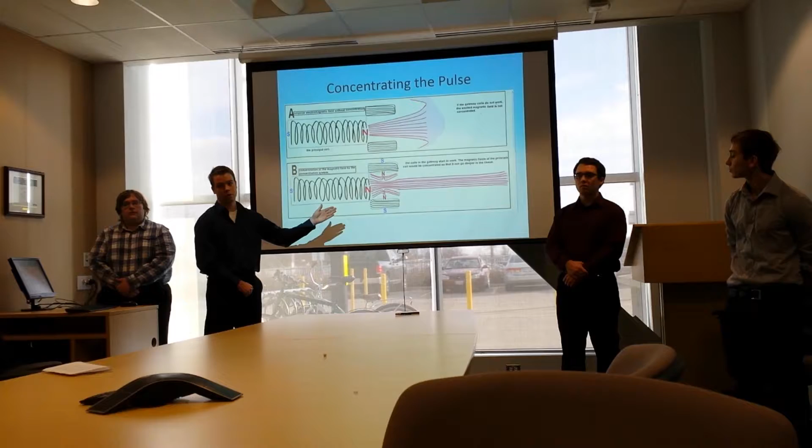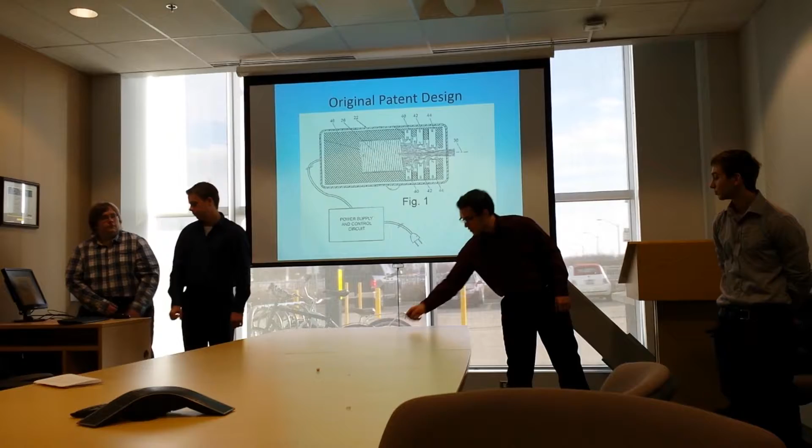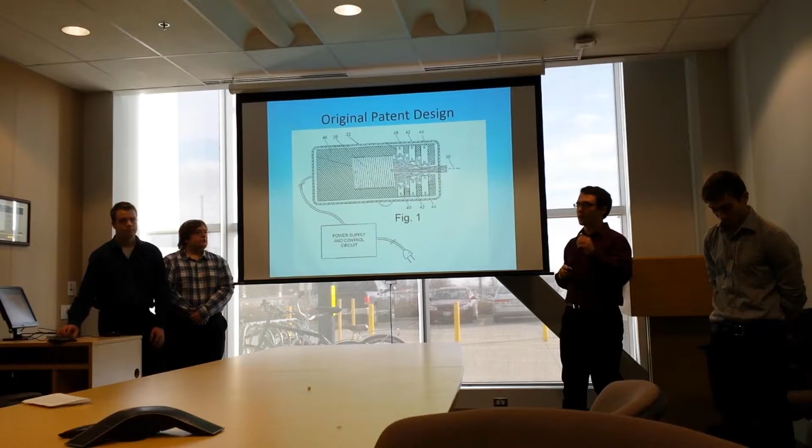All right, now we go into the physical design of the project. So we have many components from the original design as provided by Hassan. I'll label the materials and then I'll go into sequence on how they work with each other. So first off, we have the material that goes all the way around all the components. This material is called mu metal. It is a shielding material that blocks magnetic waves.

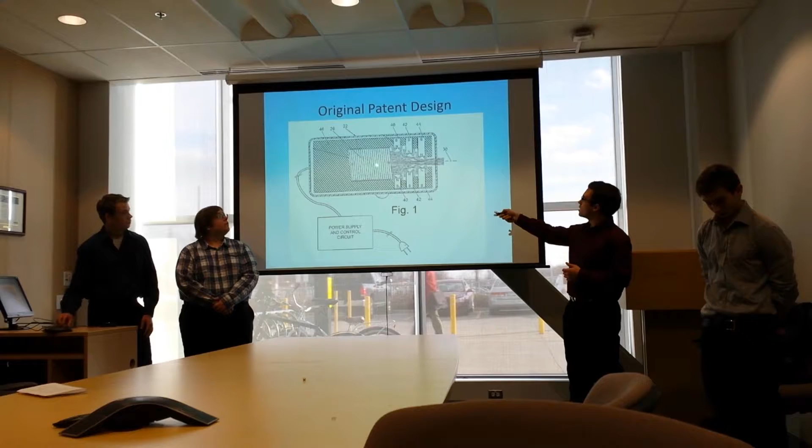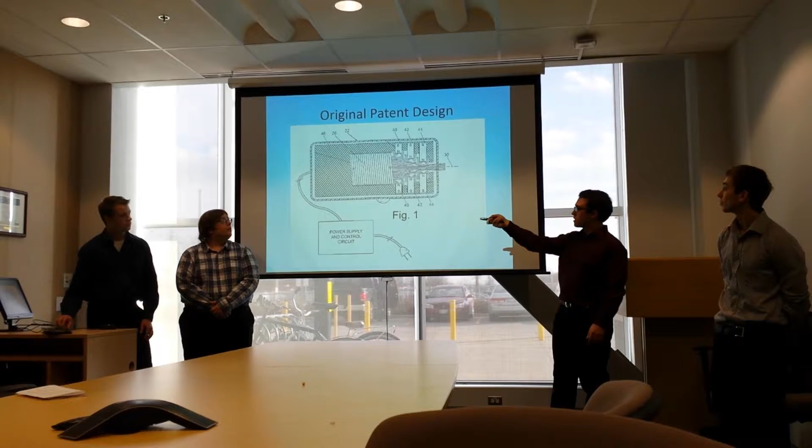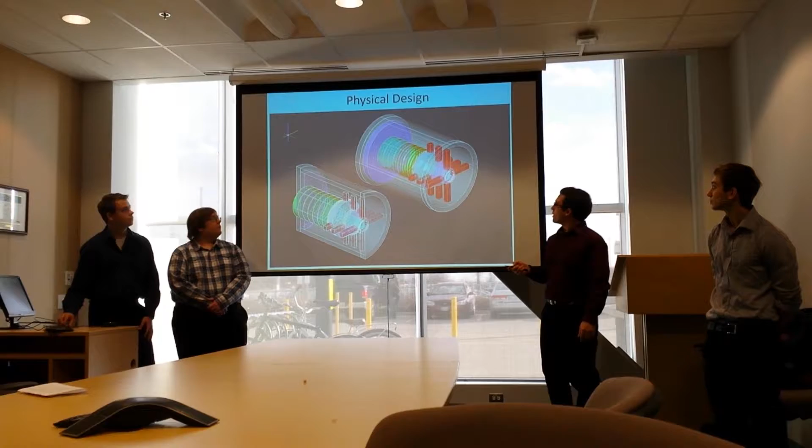The next material that I'm going to go over is the core and the coiling of the wires. This, when injected with a current, will produce our magnetic waves. Next, we have our focusing magnets. These, as discussed by Brad, focus the flux density and, as shown here, emit into a laser format. This is the AutoCAD drawing that I produced from Hassan's original patent. It's fairly similar. The main difference is that there is a lot more material.

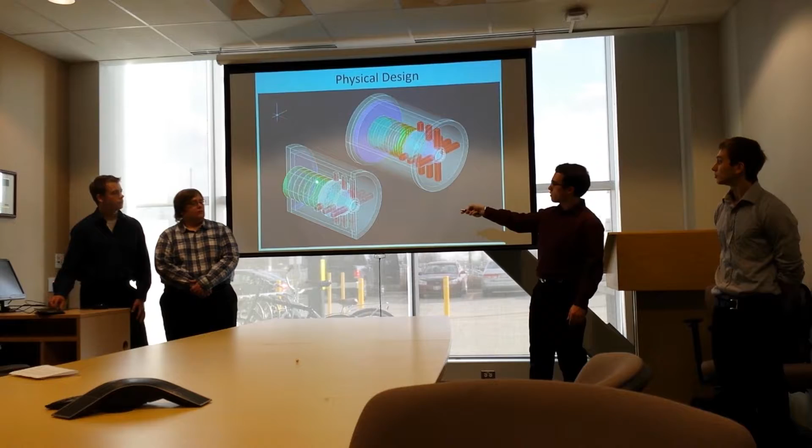So instead of just having mu metal, I've added a new material that is an iron nickel alloy, which has a higher reduction of magnetic flux that can pass through it, and then the mu metal itself can block the rest of the field. So this is the material here that's going to cover everything. This is the nickel iron alloy. This is the mu metal. Then in here we have a core with our coiled wire.

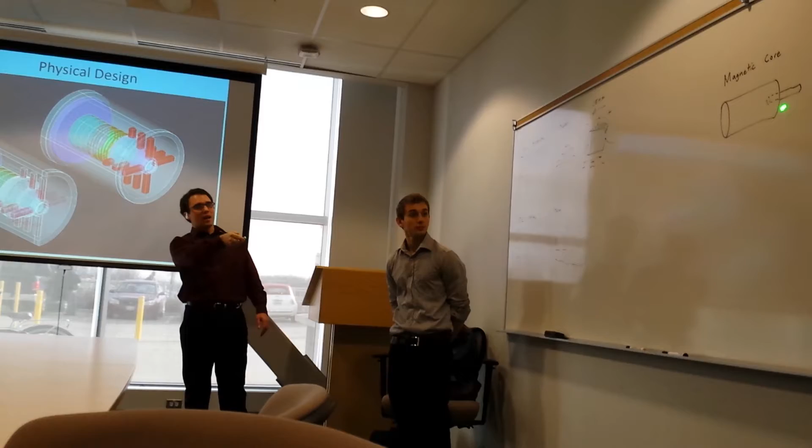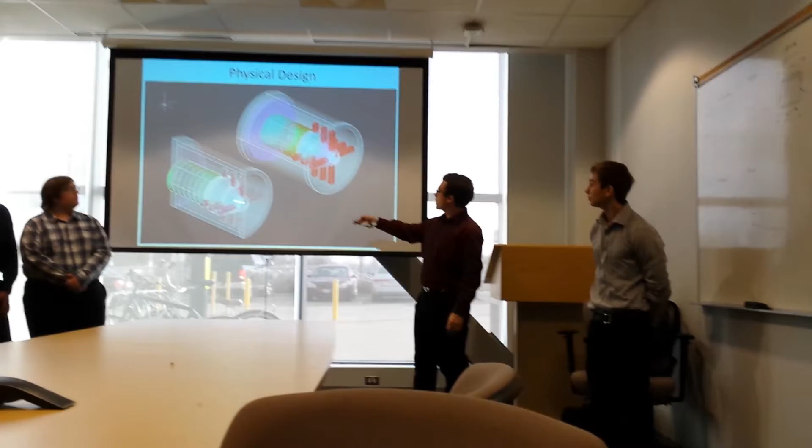Right here, this is the similar shape that it's going to be. If you can't see it, I'm sorry, I chose a poor spot. It has a small extension to allow the pathing of the flux lines so that the magnetic waves stay constant. Again, we have our magnets. Instead of just the original 6, we now have 12. And there is another material inside here called gadolinium.

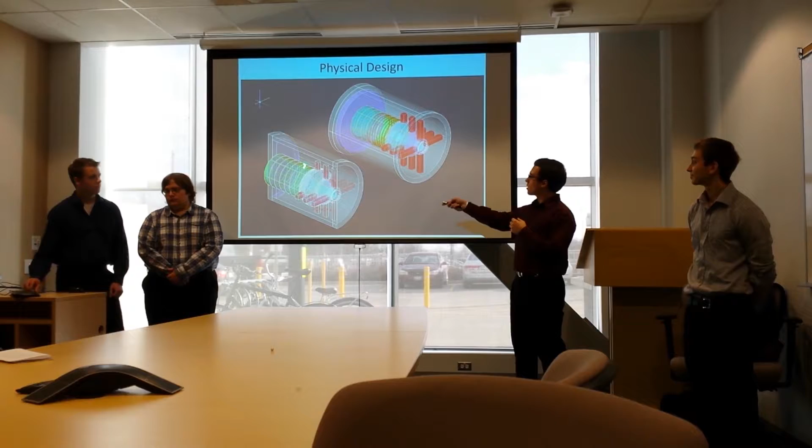I have a hard time saying it, I'm sorry. This material, what it does is reduces heat within the core here so that it doesn't overheat and melt everything else.

So upon being briefed on the project and being assigned a task of the circuitry design, this is the initial circuitry brainstorming that I had come up with in a block diagram format, being very basic. The microcontroller is the device that we'll be using to initiate the pulse modulating signal on the power source. This will be powered by a 9-volt battery so that the whole circuit for the microcontroller is optically isolated from the high power circuit we'll be using to energize the inductor.

Hassam had clarified that he'd like the device to be plugged into the wall, therefore our power source would be an AC power source. My problem with this is that when we are trying to pulse modulate on an AC signal, we get varying amplitudes, and therefore the signal is not consistent, whereas we want a signal that is more consistent from a DC signal if we pulse modulate on the DC signal.

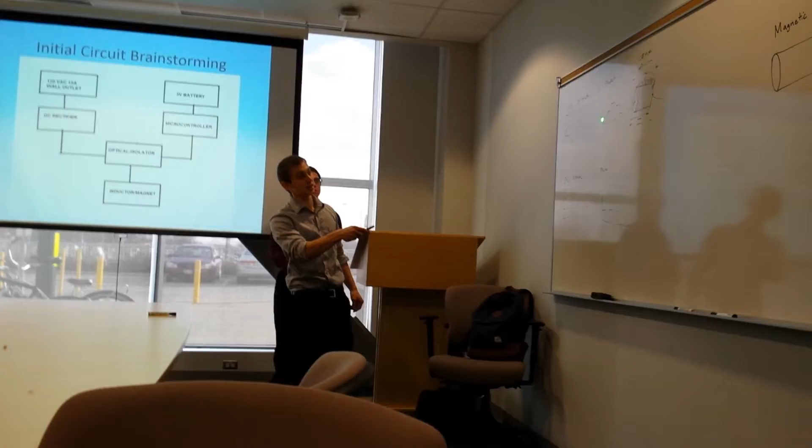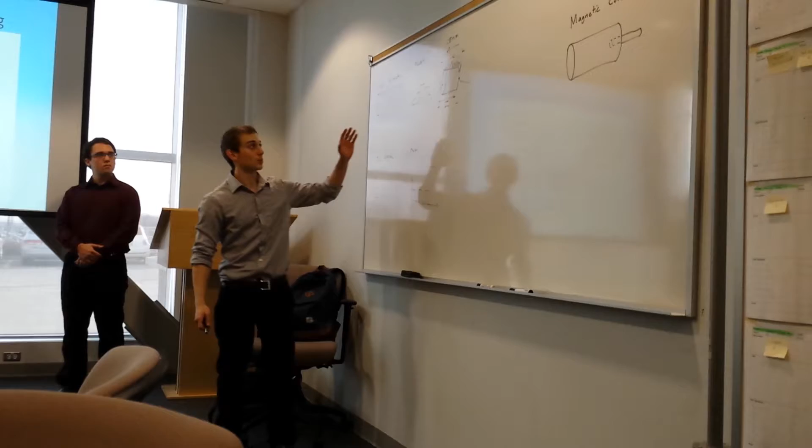Here we see the varying amplitudes that kind of follow the sine wave amplitude as it goes along, and here is just the constant amplitude. So this is what we are trying to achieve. We want that instant rising edge, and we don't want inconsistent results, which will make it harder for us to actually research and test the device itself.

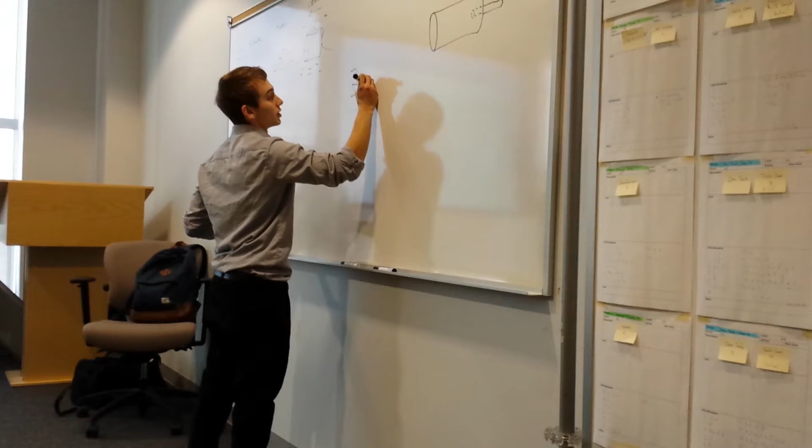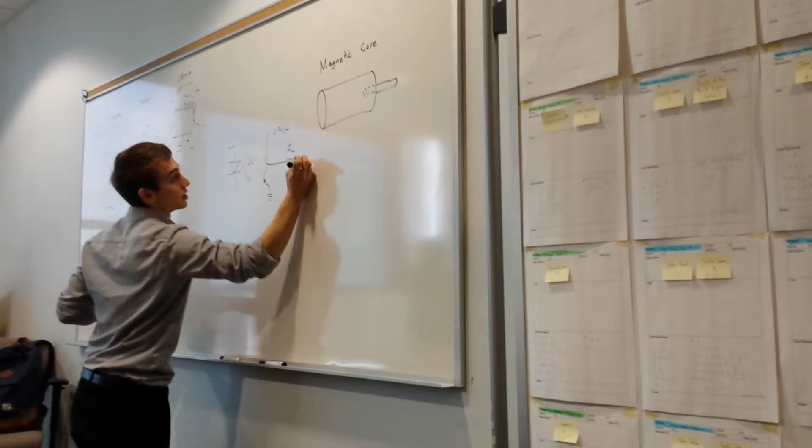The optical isolator, how that basically works, is an infrared light emitting diode, which, when energized, turns on a transistor, which will be connected to the inductor, which looks a little bit something like this. So a light emitting diode, which is infrared, acting on a transistor. This has no connection. Transistor, that's not a straight line. So current will flow to ground, and this resistive load, in our case being the inductor, will be energized. So that's basically how the optical isolator works in this scenario.

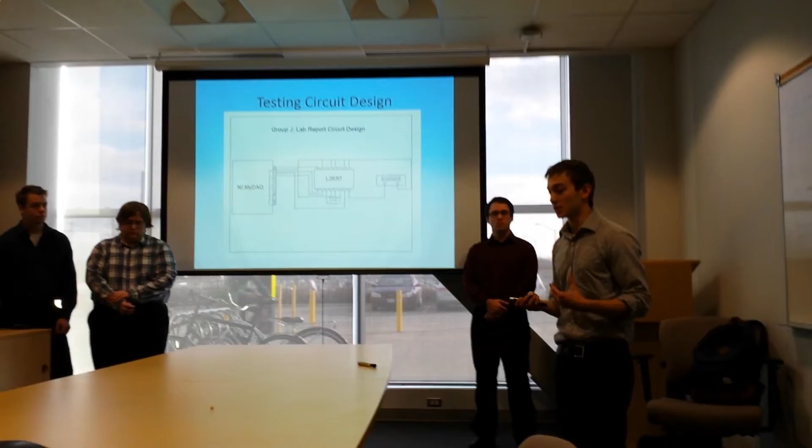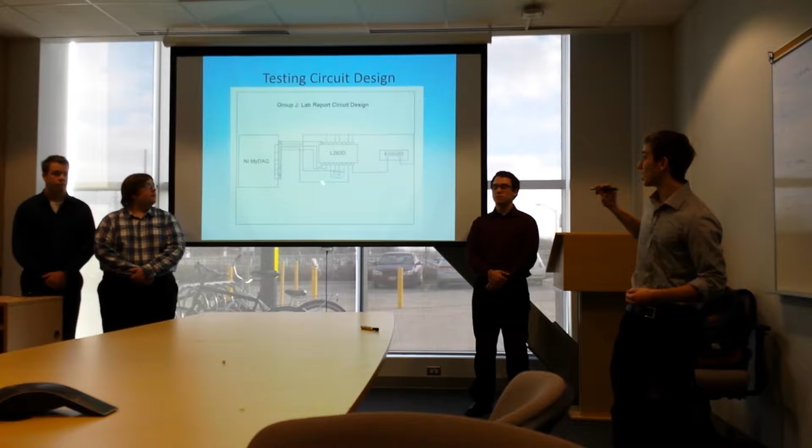This is a testing and simulation circuit design that I prepared in order to help us determine the density of the flux lines within a radius of the core, so we can kind of experiment with the nature of the inductor and get more or less a concept of how it really works when we're trying to apply the DC pulse width modulated signal. In our past courses, like Electrical Principles 2, for example, we have some knowledge of this through theory, but in practical labs, never really dug into how to actually use an inductor in a circuit.

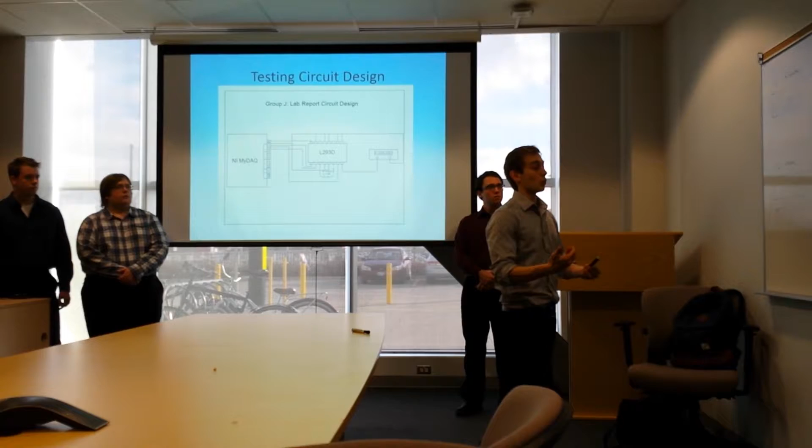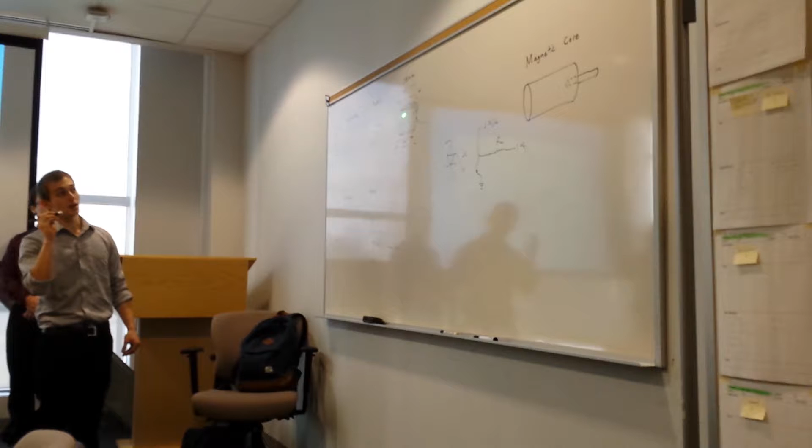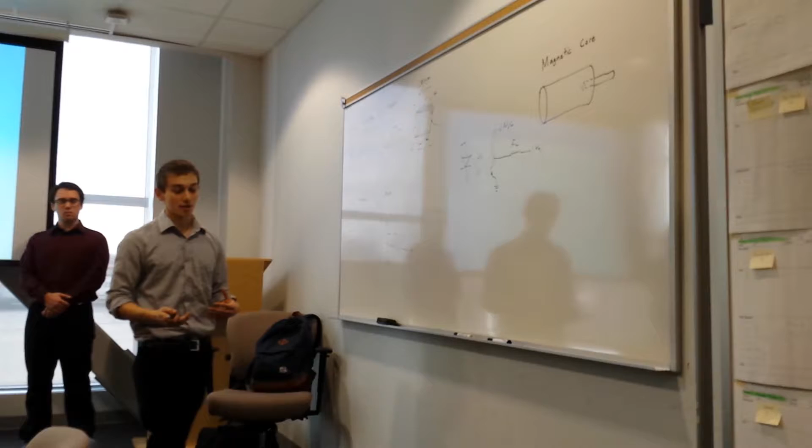So before getting into explaining a bit of the circuit here, I'll explain a little bit how inductors work in their nature. When you have an applied current or any change in current over an inductor, as we see here, current flowing to the right, an expansion of magnetic flux around the coil and the conductor produces a relative motion between the magnetic field and the conductor. This induces a voltage, which is known as counter-electromagnetic force, which opposes the power supply we are injecting into the inductor. This means that it takes a certain amount of time for the inductor to reach maximum ratings. This time is known as the transient time.

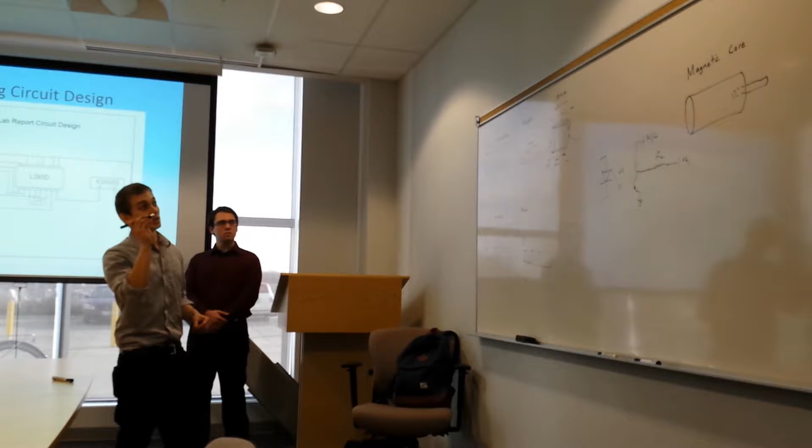What is also to be noted is what happens when we shut off the power supply to the inductor? The counter-electromagnetic force is still present. Therefore, there is a power surge the instant that we open the switch to de-energize the circuit. That means that we have to protect the rest of the circuit from this inductor here. And I've done this using an L293D chip, which we have previous experience using from a microcontroller processing course this semester by Michelle Hambury. Because we have lots of experience with this, I figured it would be the best option to use when going about testing.

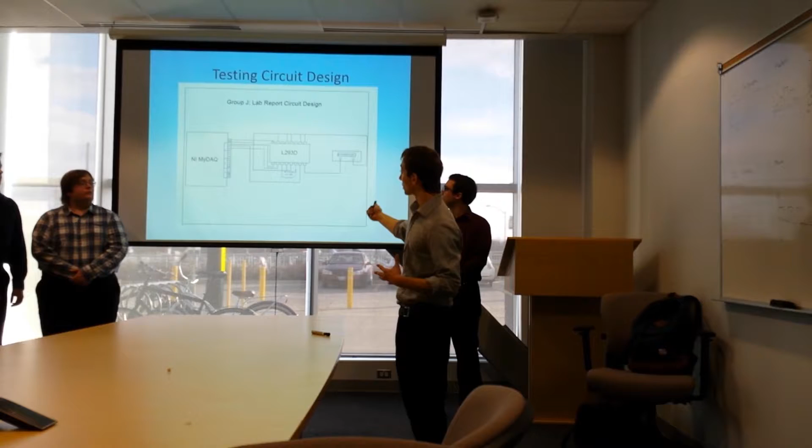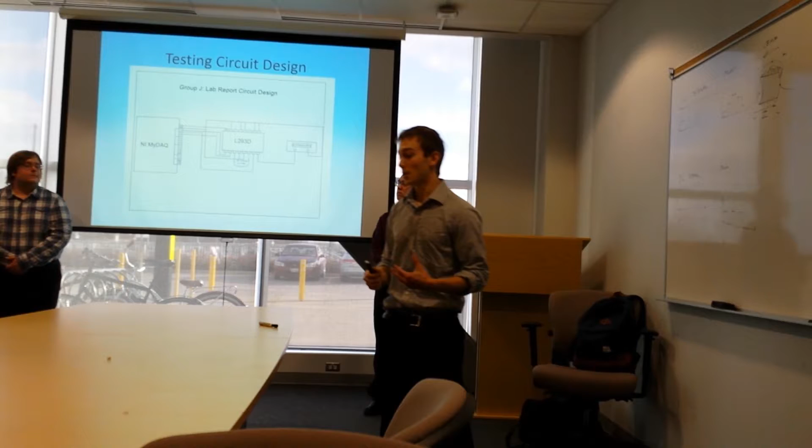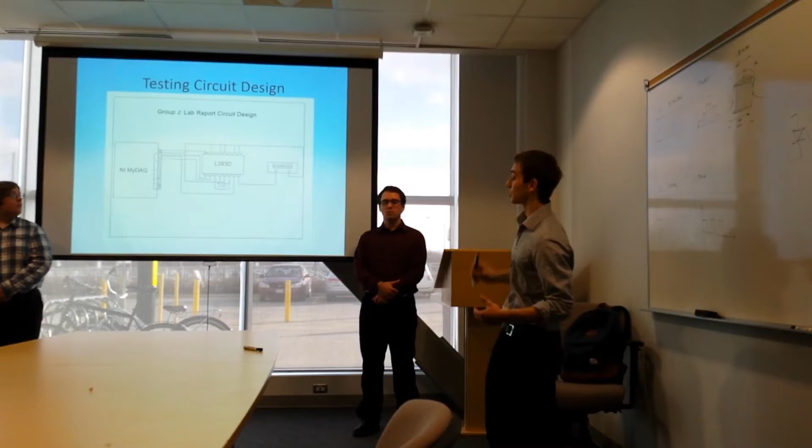The main difference between this circuit design and the prototype final design is that the power source is already rectified in DC. We can vary the voltage and current as much as we'd like to, making it very nice for us to test. Also, one other thing to note is that the specs for the L293D specify that the maximum current is 400 milliamps that we can run in the same circuit. So therefore, the current we're limited to on the DC power supply is 400 milliamps. I thought this was very good because we want to be able to use low voltages. We want to be able to experiment with the circuit without having to protect from high voltages, and just in this case protecting from the inductor.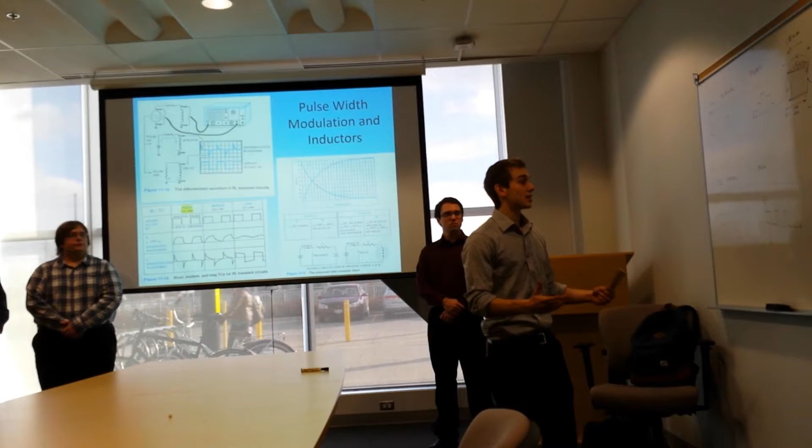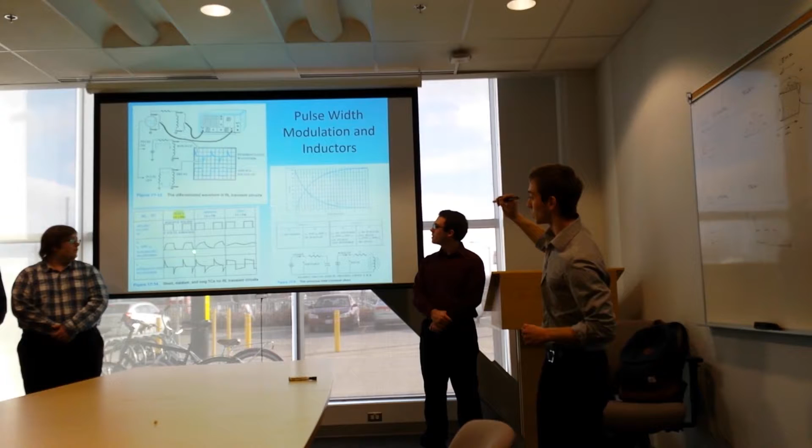So in regards to transient time, what does this mean for our circuit? The transient time means that if we spend 50% of the time building up and 50% of the time decaying, we get a gradual rise and a gradual decrease. Whereas, as Brad was mentioning before, we want that instant rising edge.

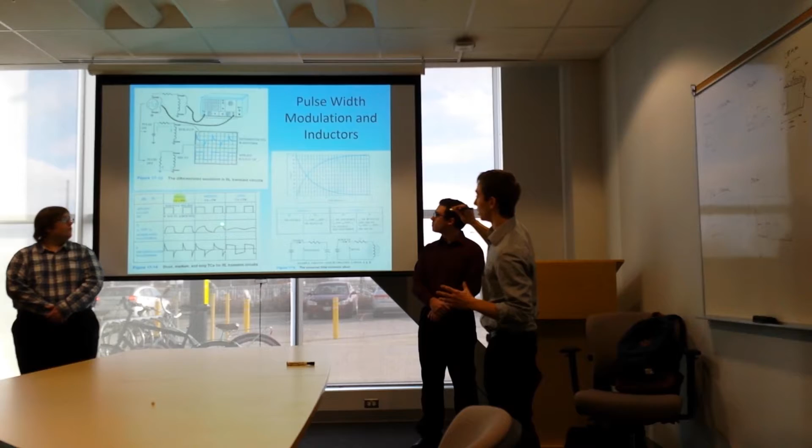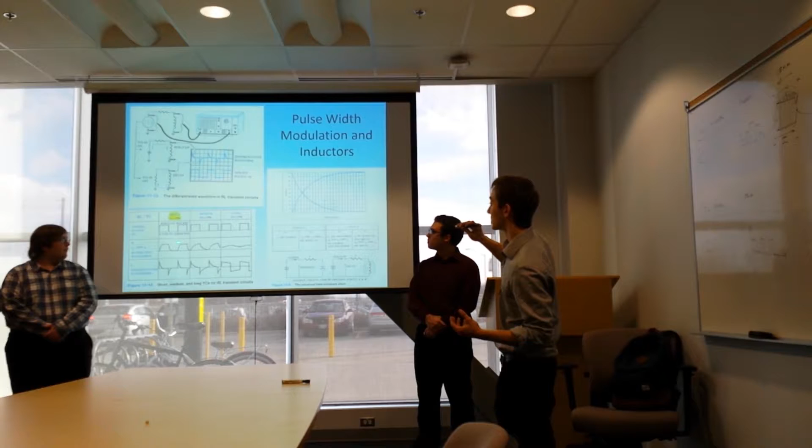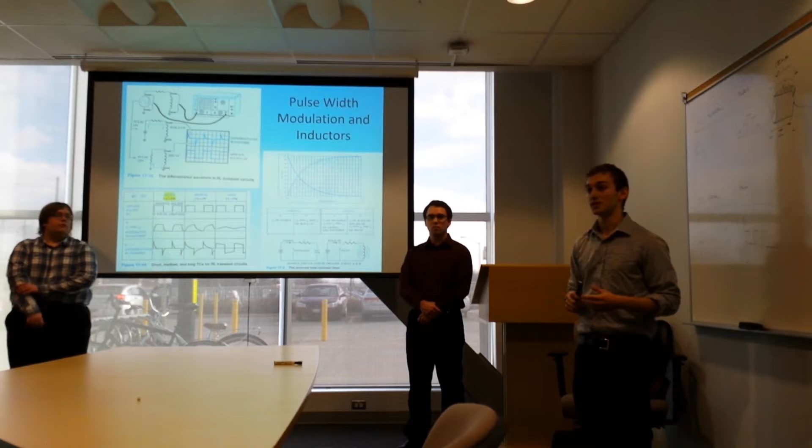And also, if we look at the right here, if we have a build-up time and a decay time that is greater than 50%, we never actually reach the maximum rating, so we don't want that either. So what is optimal for us is to have the build-up time and decay time be less than 50% of the period, which means 50% of the entire pulse, so meaning between here and here. We want that to be less than 50%, so we get more of a rising edge and more of a consistent signal, which is what we want.

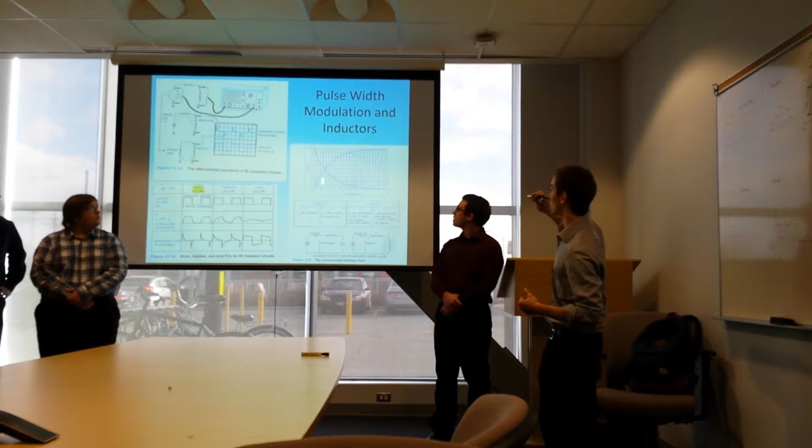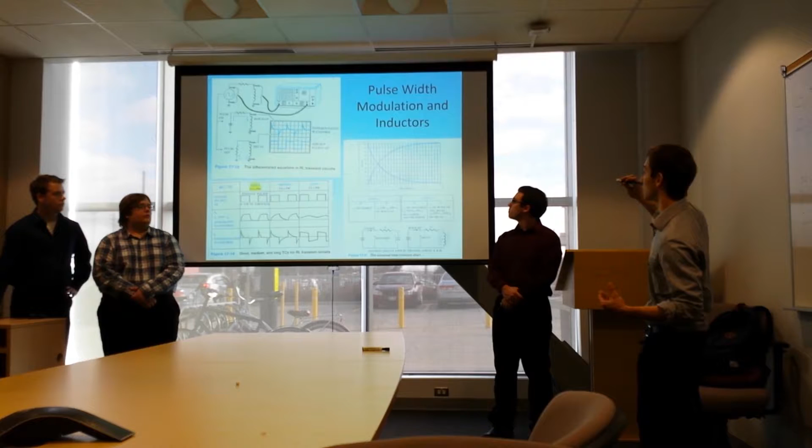Curve A and B on the right, and this graph represents current over the inductor. So curve A here represents current over the build-up time. So at the instant that the switch is closed, we start at 0% current, and we eventually rise to 100% current over 5 time constants. And the inverse happens over decay. So we start at 100% current and over 5 time constants, end up at 0%.

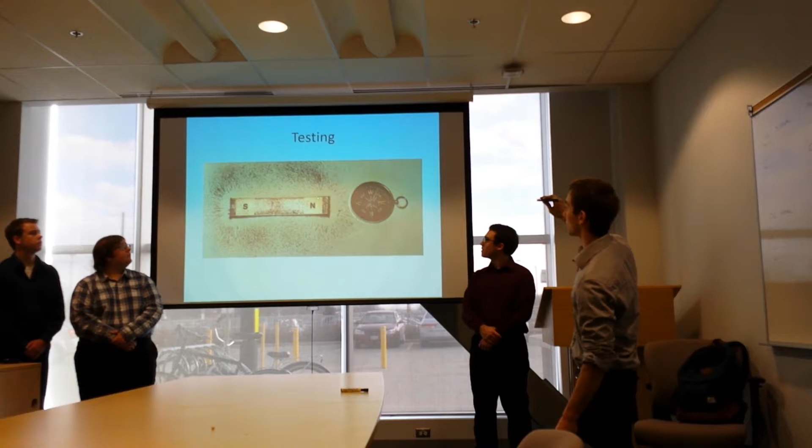So once we get all the transient time testing out of the way, another few ideas once we've actually experimented enough with that circuit is to implement some ideas such as these, which would be having iron powder, which is a ferromagnetic material which will respond to the magnetic flux lines emitted from the core. This way we can actually get a visual of how the flux lines are acting around the magnetic material. So as you can see here, the lines from the north pole are going towards the south pole. I say that because magnetic field flux lines are vector quantities and not just scalar quantities, meaning that they have a direction.

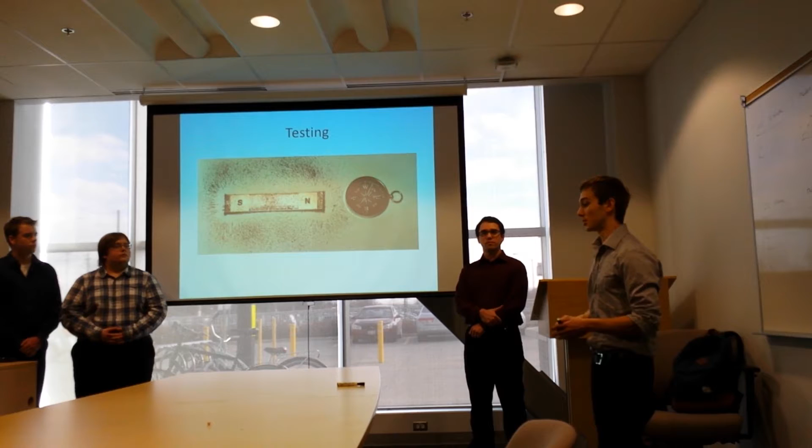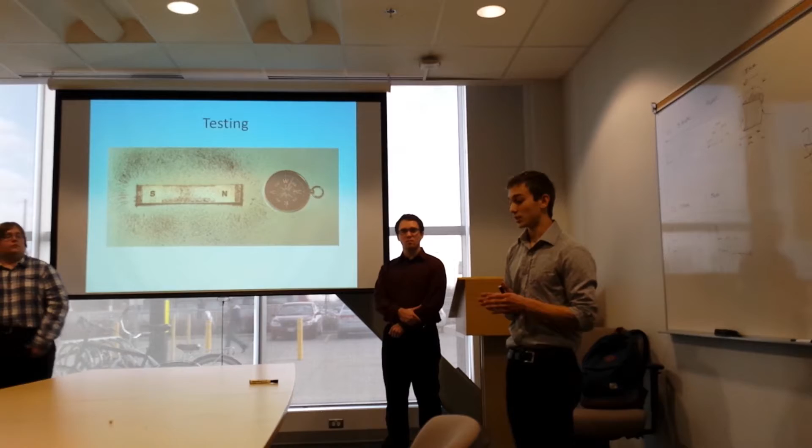And we would like to use this same principle for the core within a radius, so we can actually see, are our efforts actually achieving any results? Are the waves propagating in all directions and losing strength dramatically, or are they propagating in one direction and in a focused manner? The next testing we would like to use for this circuit is using Hall effect sensors.

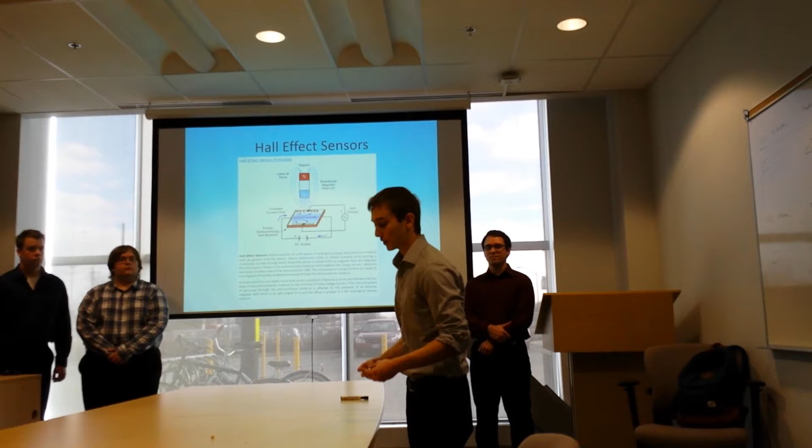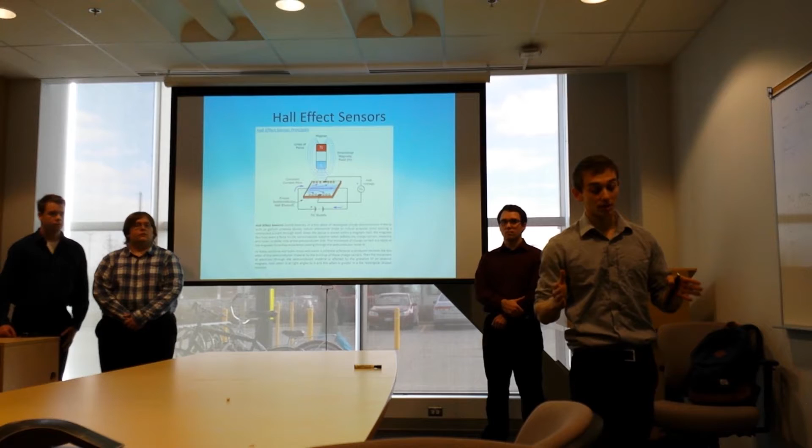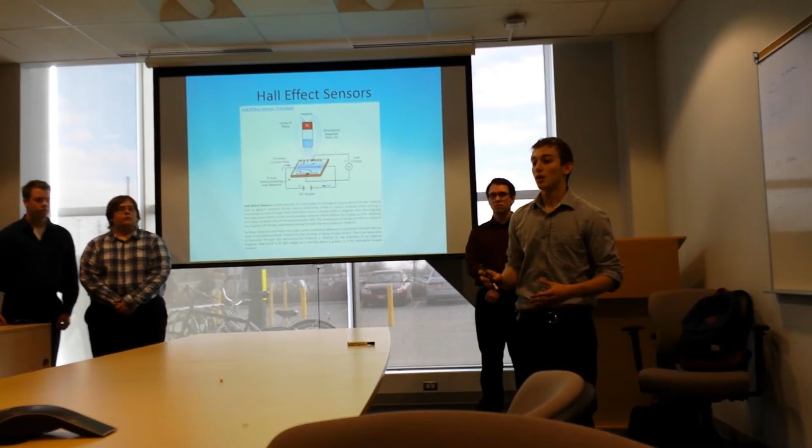So similar to a Gauss meter, a Hall effect sensor runs a small current through the semiconductor material, which is influenced by external magnetic flux lines. So when this happens, electrons move to either side of the slab of the semiconductor material, and it creates a potential difference known as the Hall voltage, which we can measure. So this will let us, again, get a real idea of where the density of the flux lines is the most. Are the magnetic field waves propagating in the way we intended or no? These are the questions we'd like to answer.

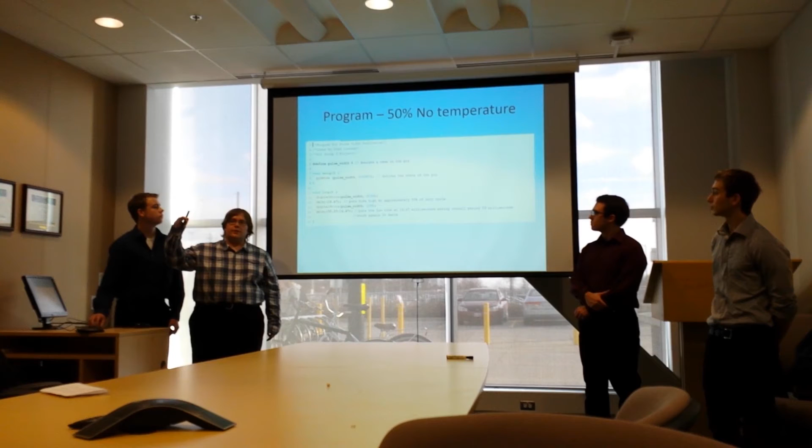So for what's next, after the break, we have to order the parts. We have to build a simulation circuit, test that circuit, build a prototype, test it, and then finish the technology report. Any questions?